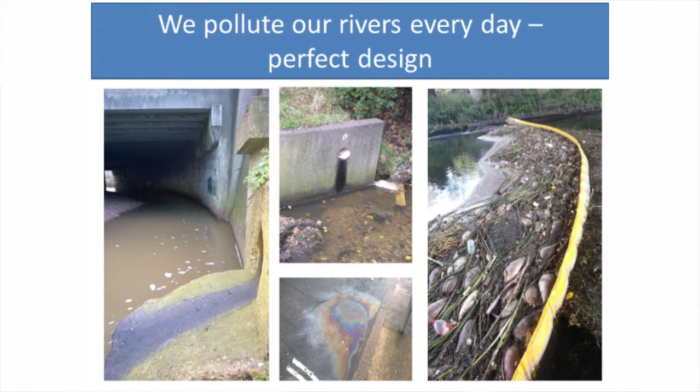And you have large signs like this in places like a public park in Haringey telling people to stay out of what should be something they have a right to enjoy, whatever age you are. And it's coming from a variety of sources. This is a constant problem in not just London's rivers, but across the country, that results in what's called the first flush of pollution.

So this is coming off our roads, a variety of roads here going into different rivers. It's the hydrocarbons, all the stuff that's coming off brake pads, off tyres, and drips of oil and petrol coming out of the cars. And despite supposedly cars being a lot cleaner than they were, it all depends on how often they're serviced and also the volume that you have. All cars leak to a degree, and if you have 2.5 million private vehicles, as you do in London, plus all the other forms of transport, it all ends up on the roads.

And I saw some figures the other day that were talking about the billions of gallons globally of oil that's being wasted out of our cars, which of course leads us to then exploit more and more rare forms of hydrocarbons around the world, causing other forms of pollution. So our inefficiency is borne by our rivers, and the problem there after particular weather events is it ends up killing large amounts of fish and invertebrates and other aquatic creatures, as well as poisoning our water supply and costing even more money to clean that up.

So it's kind of a nonsense system, but it's designed exactly like this. This is working at maximum efficiency, really. So this is a kind of testament to the madness in our design, sadly.

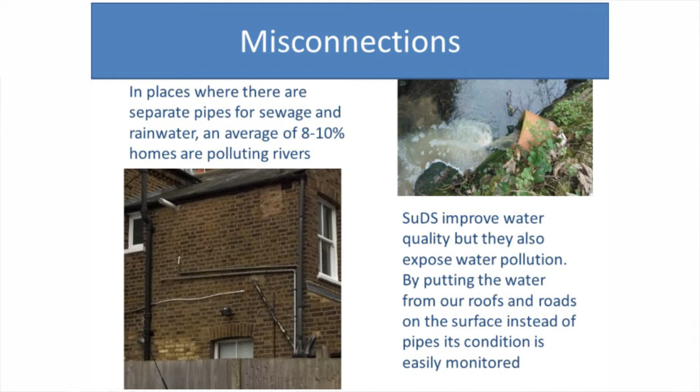Misconnections, where you might have a home or a property that has connected its wastewater appliances or toilets either unknowingly or negligently to a pipe, a guttering or a drain pipe that's meant to be just for rainwater, is a big problem in London and around the country. I see it separate to the kind of pollution that comes off roads. I don't think it's very helpful to combine them all into a description as diffuse urban pollution.

One, it's a lot of jargon in one sentence, but also you lose sight of the causes and the reasons for this pollution happening. I don't think that makes it effective in terms of coming up with ways to tackle them. We see some parts of London where it's in excess of 10% of properties that are either allowing their raw sewage in terms of excrement or dishwasher, washing machine wastewater to go straight into rivers, which is pretty disgusting.

By putting the water on the surface, by getting it out of the pipes, that is a fantastic indicator of how healthy our urban water cycle is, and it makes it much easier to detect. Unfortunately, in too many places the pollution comes out at the end of a pipe, and it's almost too late then.

And it also detaches the responsibility for the problem away from those residents who should be interested in caring about that. So you'd have the peculiar situation where people who care a lot about rivers have no idea that they're polluting the river that's within a 200-metre walk of where they live. And then when they find out, they're astounded that this can happen. But that information is rarely out there, so we don't empower people to make that kind of choice, which again is a weakness in the way that we're dealing with these problems.

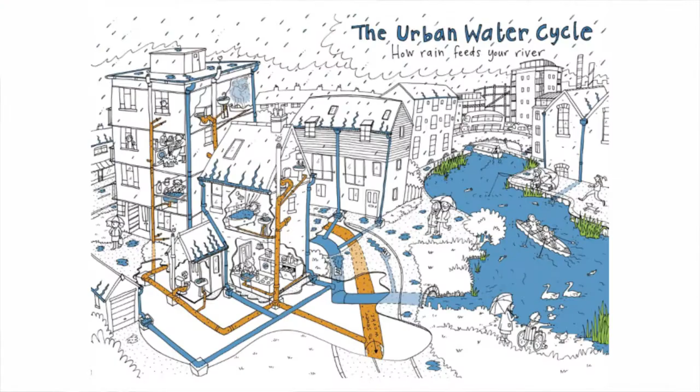So the Love the Lea campaign was our public vehicle for working with people. It started off very grassroots, and it was about getting an understanding of people's perception of the urban water cycle and their part within it, and developing resources that made that easier. Some of that is working with illustrators who do children's books and coming up with graphics and designs that just make it much more immediate.

You can go online and click onto various websites which talk about things like misconnections and the urban water cycle, or the water cycle, and they're pretty impenetrable. A lot of the water cycle things show us an idyllic mountain with rain falling on it. It turns into a little river, it goes past maybe a few schematic sewage works, and then comes out into the sea.

So that makes people think that the water cycle is out there wherever that mountain might be, I don't know, Middle Earth or Snowdonia or something, when in fact it's where they live, it's their street, their roof or their road is part of that urban water cycle. So we aim to give them that understanding of that.

And then it was giving people the tools to prove that their rivers were sick, that their rivers were unhealthy, and that's where we brought citizen science in. And that meant that people who had rivers in their parks that they knew were polluted, you could see if a river is healthy or unhealthy, then had the science, the hard science, to go to their council and say, this river's sick, something needs to be done about it.

We have a responsibility, all of us, if not just because it's the human thing to do, but under things like the Water Framework Directive. So with that in mind, that then meant that we could start to apply pressure, if only through emphasising the fact that there was a problem. And people say, well, it's depressing hearing about all the bad things that are happening to rivers. How can we make things better? And sustainable urban drainage systems are a very big part of that.

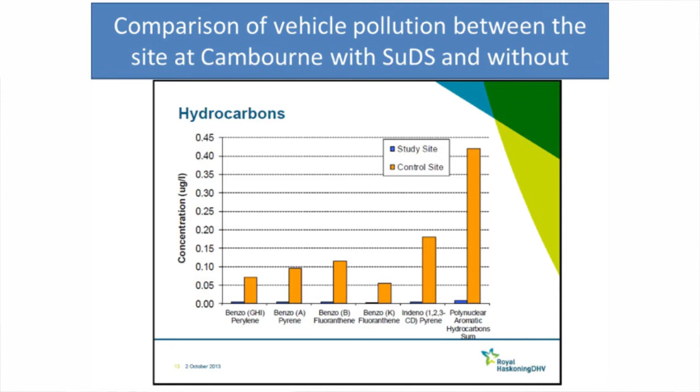Again, petrochemical oils and burnt hydrocarbons: minimal amounts coming out of the SuDS, much higher amounts coming out of the areas off the streets where cars are parked and all that kind of stuff. It's not oil that's being dumped. This is just the natural kind of drips that come off cars.

And one of the reasons why there's such a drastic and stark difference is because the bacteria in the natural environment within the SuDS will consume hydrocarbons. Petrol, for much of it, is a natural set of chemicals and molecules. It's historic, prehistoric shellfish and all the rest of it. So it can get broken down and turned into its basic compounds.

So with all this in mind, we thought what we have to do in London, because there's no effective or comprehensive approach to sustainable drainage in terms of water quality to this day, we thought we had to show that it could be done. So these weren't pilot projects. These were aimed to be demonstration projects to be replicated across London. So we're in the early part of that phase.

We've got a chunk of money from DEFRA. We chose, in consultation with London Borough of Enfield and the Environment Agency, the Salmons Brook, which is a little bit south of the M25 in northeast London. And it flows west to east, pretty much, through a range of communities and areas.

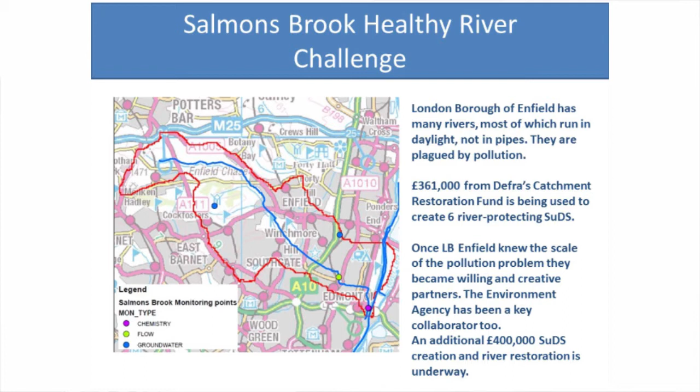And we wouldn't have got to this stage if we hadn't involved people and made them understand the problem that was out there. If we'd have just said, hey, we want some money to do some SuDS, I think the scheme would have failed, because if you say to people we want to improve things for water quality, that's kind of a meaningless statement. We want to make rivers healthier. So you had to have meaning in the reason for doing it.

And once we had that, the council reasonably and sensibly recognised what we were saying couldn't be ignored, and if they had ignored it, it would have perhaps been a bit of a risk, and they fully embraced the whole agenda. So I would say that London Borough of Enfield is the Portland of London. And the Environment Agency provided a lot of assistance in making that happen.

Scoping the locations, we made that a bit of an X Factor kind of thing. We said to people, who wants these, rather than saying we want to put them here. And so we had a limited amount of money and sites, and that gave it a sort of cachet, I suppose. Grovelands Park was the first site. A traditional historic park, very landscaped, lots of the roads drain into the local park, pond and lake and river. Working very closely with Robert Bray Associates, we got designs made.

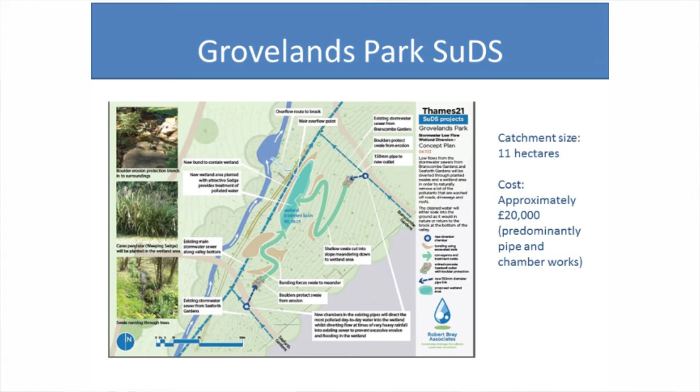So the two dotted lines coming up from the bottom are the course of the old pipes that would have gone straight into the culverted river. So they were removed in these plans, and some swales or shallow ditches created. And at the same time, the council got money to take the river out of its underground chamber and restore it to the surface. So on the right-hand side, you have this new river that had been hidden away, and obviously the SuDS on the left preventing pollution getting into it.

So that's the perfect combination of river restoration, and I don't think you can really have sustainable river restoration without SuDS. And the little posters are the temporary signs we put up at a public exhibition, if you like, shown around the SuDS systems, around the swales, just to give people that understanding.

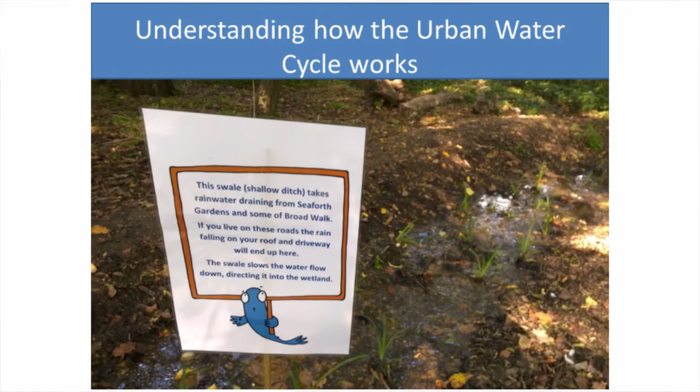And it's a series of winding shallow ditches, these swales that have been planted, and increasingly they will start to process more and more pollution. At the moment they're providing some attenuation, which again protects the river from big surges. But at the moment they're at their most raw. The more vegetation you have, the more effective it's going to be in terms of holding water and treating pollution.

So we got another chunk of money from Thames Water, and that will be to create the permanent signage, but we'll do that with the local people, so they fully embrace and accept and help design those signs themselves. So while it might mean that the design times are a bit longer, I think the future preservation of those SuDS will be enhanced because you have local people who will want to look after them, as opposed to them having to be done by contractors, which can be done as well, of course.

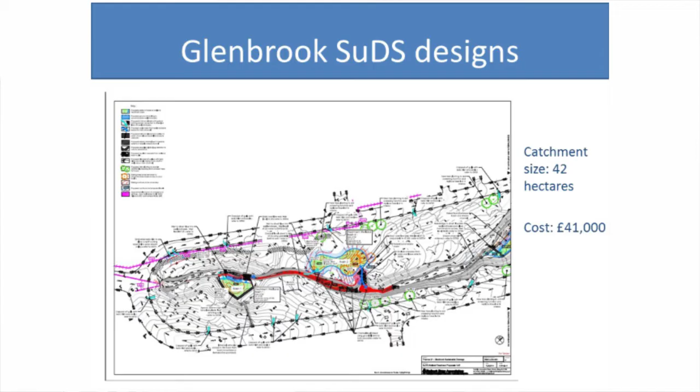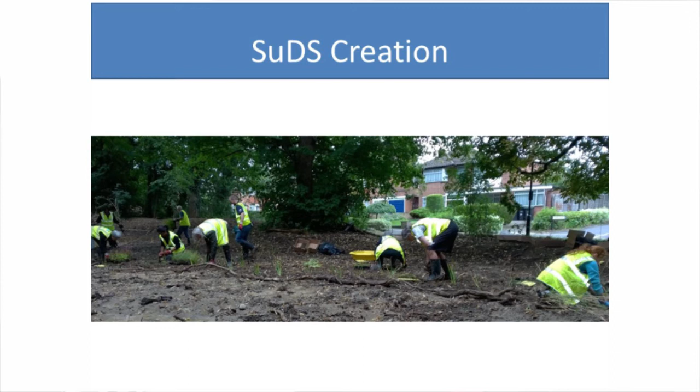And that is beneficial for many, many reasons. And it's also good fun. I think there's not enough fun and SuDS combined. You need to have more of that. If it remains a sort of technical discipline, then it's unnecessarily excluding a lot of people. And you give people that narrative. They know the plants they put in there, they know when they were put in, they get an understanding, they become experts in their local water catchment.

One of the big problems was because there's so much paving, 22 times the size of Hyde Park has been paved over in London in the last generation. When it rained, we would get an incredible surge of water coming down into the river, which would strip out the gravel that we had put in front of these sort of weirs here. So that meant we had to adapt and amend the way we put it together.

The company we used, Maidencroft, had 2 people on site for the whole time the project was going on, and that meant they built up an expertise as well. So they saw these storm events occurring and were able to respond to it in almost real time and feed that information back to us, back to the designers, back to the council. So it became incredibly robust as a way of developing these SuDS.

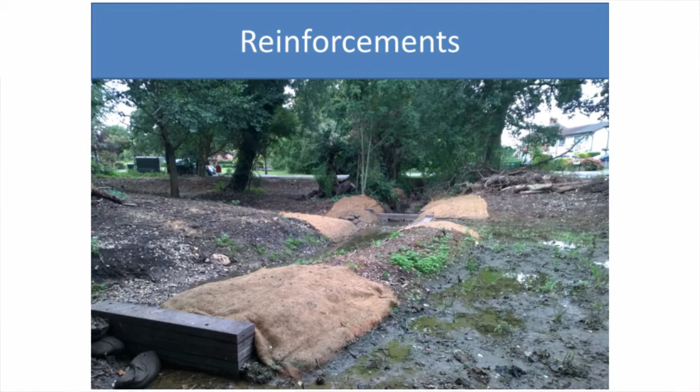And if they'd have gone in and built them within 2 weeks and then left, and there had been a major, or not even a major, but a significant rain event, all of that stuff would potentially have been ripped out, and we'd have been left having to scramble and get people back and pay large amounts of money to get back on site rather than responding on site. And it saw the need to strengthen certain areas, because it's very much a bespoke system. We're creating a wet woodland habitat, a sort of post-glacial landscape, if you like, but in the 21st century. So it's going to need fine-tuning.

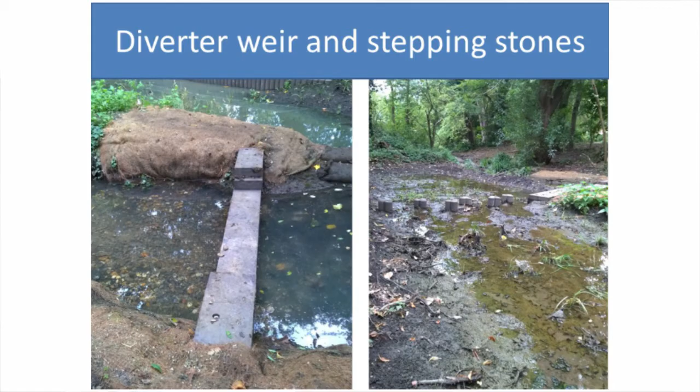And just to show you on the left-hand side, as the water comes downstream from the right, the diverter weir will send it into the basin at the top of that picture on the left-hand side, where it'll get processed in time as the vegetation flourishes. And we've been able to add, with the insight of Robert Bray Associates, stepping stones and things like that. So we've created a very different landscape, and that wasn't the intention in terms of one of the outcomes of the project.

We never pitched that as one of the reasons we were doing it. It's all about the river quality and our right to clean water. So all these other benefits people kind of discover for themselves rather than us having to push them in their faces and say, look at all the wonderful things we've done for you. People can just explore the landscape without coming to some kind of narrative.

The fact that they planted in August and September, and now it's still very warm, has only helped in terms of plants establishing. And again, another unexpected benefit has been that the river itself is functioning much more like a natural river. So we're having the creation, the establishment of gravel banks, which will change depending on the amount of water that's flowing down. So it's a place that looks like a river, that feels like a river, that people want to protect because it is a river, as opposed to a concrete channel.